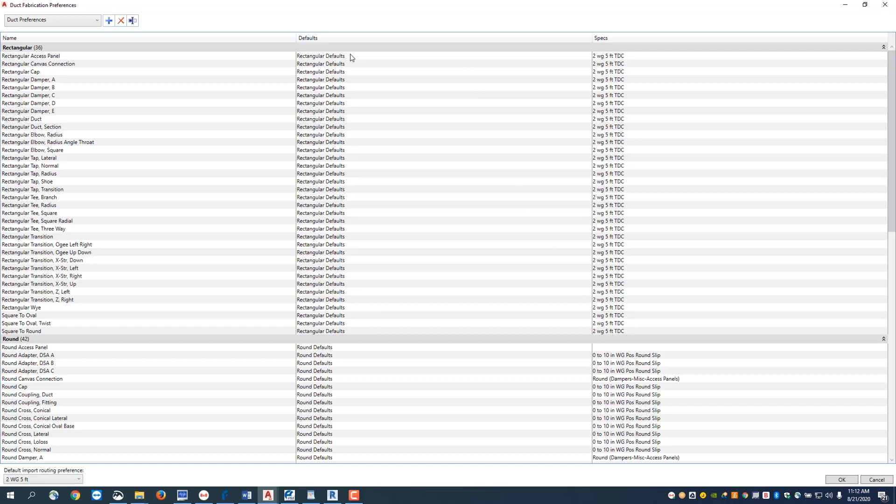If I come up to one of the lines and they're blank and you need to fill them out, you just click on it and go to the pull-down. Now I can say I want all my rectangular defaults for this entire category, so I just hit All. That will populate the entire rectangular. You'll have to do that to the round and the oval, and to the specs, but once that's set up, it can be saved with your template.

It also works in conjunction with your routing preference. You can see here in the lower left, this is my routing preference that it's going to work in conjunction with. So now if I go back into EC-CAD and close this, I can come over to my Insert ribbon.

I can go to my Revit import, and from this I'm going to select the file I want to bring in. I'll go to my demo folder on my desktop, and in that you can see here's the video exhaust that we did in the previous video. I'll say I want to import that, so I bring that in and map it here to my duct preferences, and tell it to go ahead and import that.

Depending upon how large your file is, it can take a little while to import larger files. You can see in the lower right-hand corner of my screen there's an importing Revit systems status going on. This is going ahead and assigning those manufacturer's defaults and specifications to what was drawn inside of the Revit model.

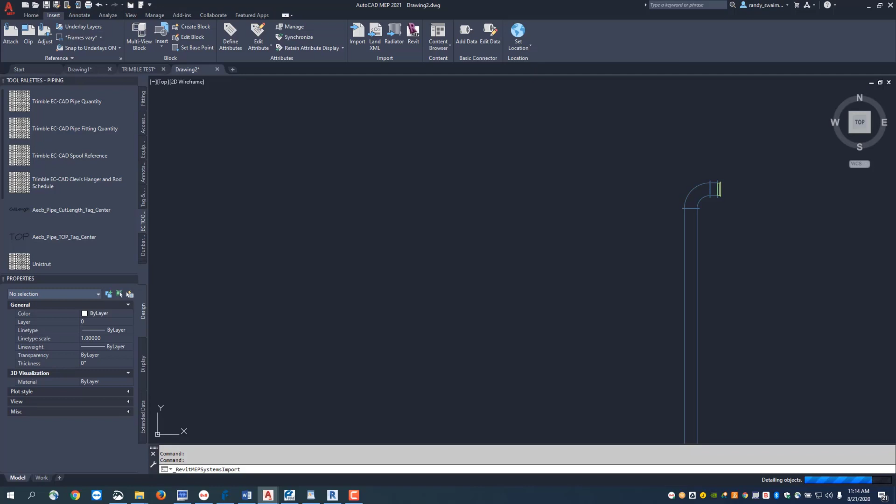It's going through now and applying the detailing to the objects. This will automatically add any selected text that you had set up to be an auto tag, so it'll place these on them as well. When this finishes, you'll see it paint back up on the screen here, and there's all that exhaust ductwork.

Now I can come in here, and if there have been any errors, I can go to my Home tab and to the pull-down under Load Catalog, and look at the error log. I have no errors, because it would show the number of them here.

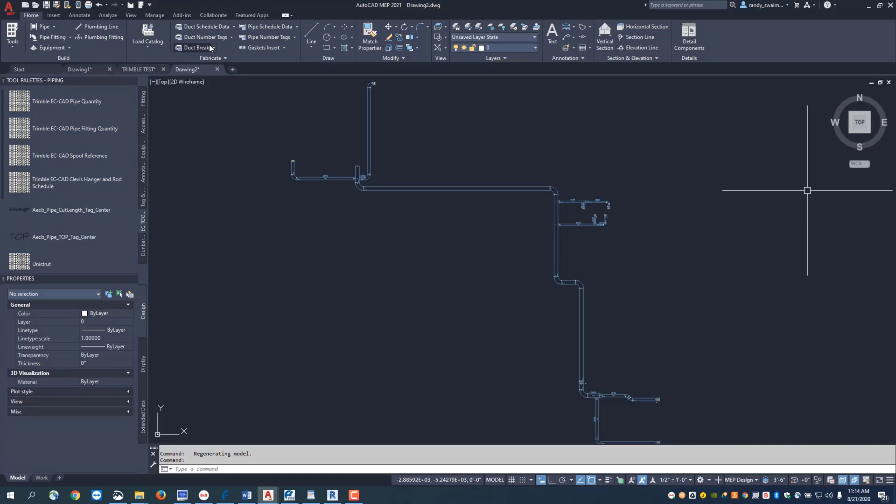Now I can say I want to break this duct down for fabrication. To do this, I'm going to go back to my Home ribbon and go to my Duct Break command. I've hit Duct Break and it's telling me to select my objects, so I'll go ahead and select all the duct here and hit Enter.

Now it's going to start running my duct break. You can see, again, in the lower right-hand corner, I've got a status bar indicating that it's working on breaking my duct. That's done, and the duct is now broken into its fabricatable sections.

If I come back into my drawing now, we can zoom into some of these and take a look. It's still going through there, executing the detailing portion of this for a second—let's let it finish.

Then we're going to put this into a different view to look at it. Now you can see it's picked up over here, telling me that it's detailing the objects. When that's done, we'll be able to go in and look and see what we have.

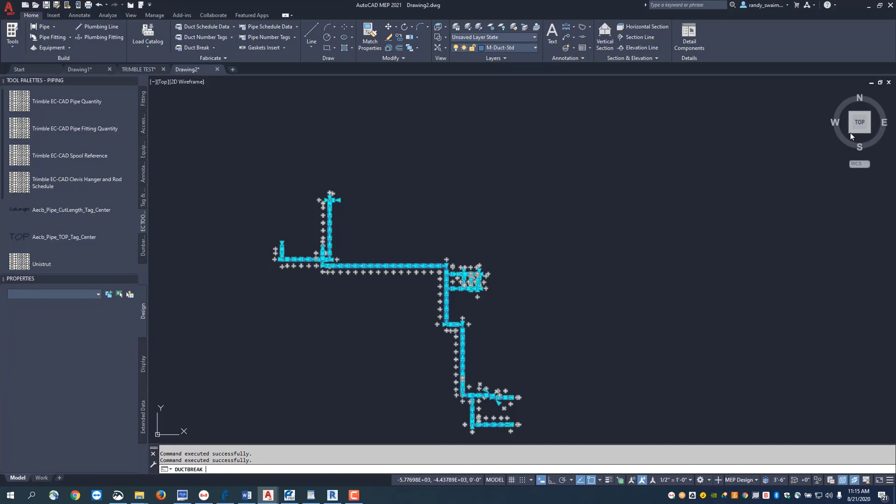Now that's done, I'm going to put this into an isometric view by clicking my view cube on the corner. That's brought me in here, and now I have all my individual sections. I can use the other commands here to make some changes.

Maybe I want to put in some different fittings. Here I've got about three fittings making a bit of an offset. I'm going to select those fittings and delete them.

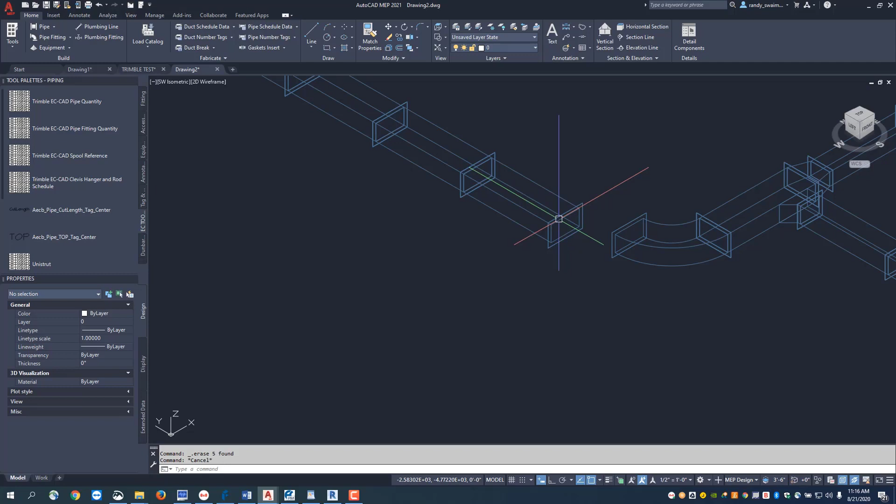Now I can say I want to take this piece of duct and hook it with this piece of duct. I just highlight the two pieces, and now I can tell it up here that I want to come through there with an Ogee offset, and I'll apply that.

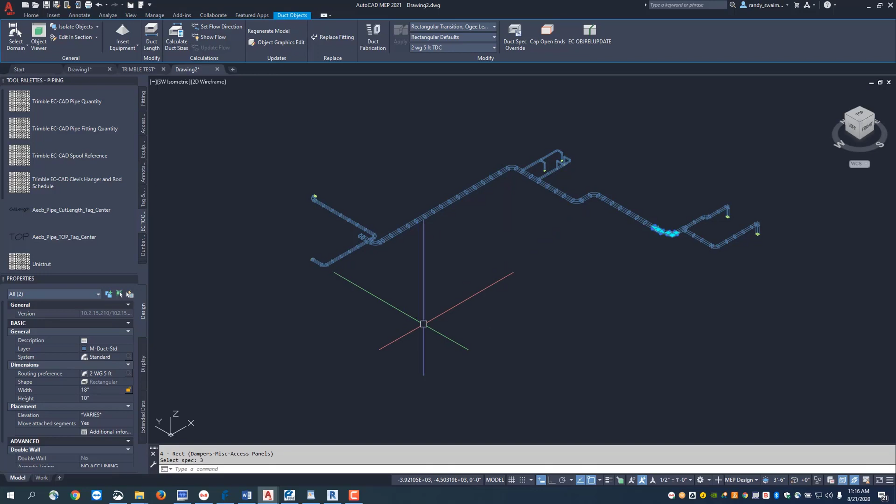Now that's applied, and we can go ahead and number the duct out, and it's ready to be picked off and sent to the cam station. And that's bringing the duct from Revit into EC-CAD.